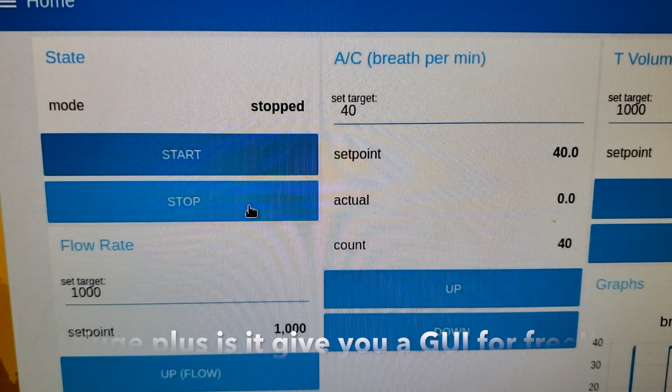I'm using Node-RED as the engine. It's kind of an experiment. I never used it before, but I like some things and I don't like some things, but that's beside the point. So we have like an on-off kind of thing. Breathing rate, I think we're set for like 40 breaths per minute. Tidal volume, 1,000 I think is more than we want to stick in a person of air.

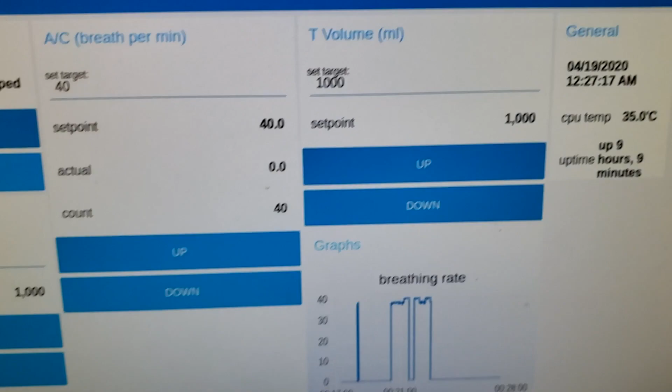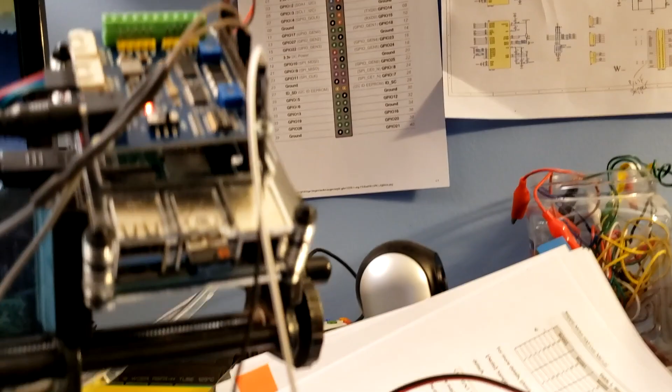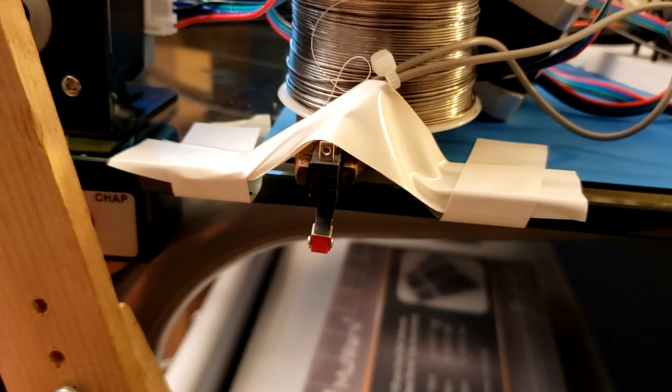And flow rate. So I decided to use a Raspberry Pi. There's many controllers you could use. I like Raspberries, but you could use Arduinos. A lot of people are doing it with Arduinos. This is like a stepper motor hat. Yeah, so these are stepper motors. This one happens to be 1.8 degree, 200 steps over 360 degrees. And I have like a homing switch. This stuff will make sense in a minute.

So we'll just go ahead and turn it on. Oh, and the cool thing about this Node-RED I'm using: you program it up with JavaScript and a little bit of Python, and it's an IoT kind of thing. So there's a lot of IoT type things you could do, like turn it on with Alexa. Alexa, turn on the ventilator to 10%. Starting.

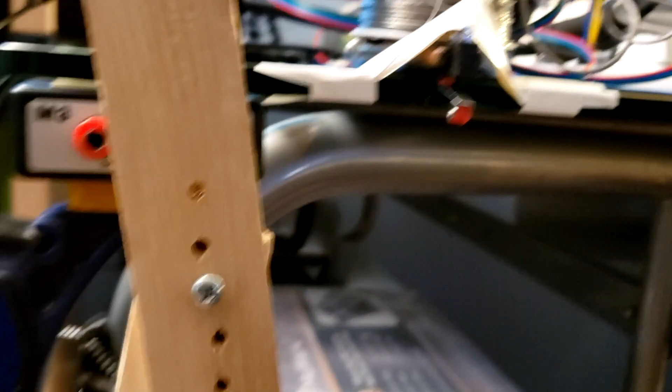So I don't know if you saw that, but basically it located that limit switch because it needs to know the home position, they call it. Anyway, so this is sweeping back and forth about 90 degrees. So 90 degrees is my maximum. So basically, in theory, what this contraption is going to do is take rotational movement and make it linear.

So the back and forth on this left-hand side would be like a bag, like a bellows bag. So that's on order. So it's moving maybe about 4 inches. And the nice thing about a bellows bag is it's kind of linear. It's a rectangular type, like a cylindrical rectangular thing. So if I move like an inch, I know how much volume, in theory, is supposed to go into somebody's lungs.

So if you notice, this is sweeping about 90 degrees. So if I want to put less air into somebody, we just go in here and say I cut it down to like half. The cool thing is this thing has error checking, so if I go up, it says 1,000 is my maximum. So say I put a bunch of 9s in here. So you get warnings. So I'm going to go ahead and stick 500 in here. Oops. 500. Okay, it took it.

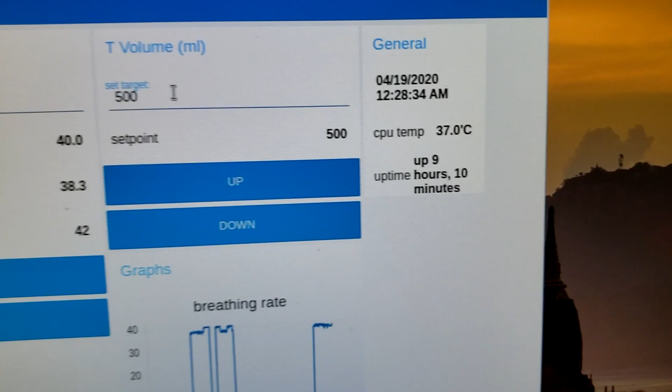So there it goes. So at this point, we're moving 45 degrees back and forth versus 90. So that's what that tidal volume is. So I'll stick it back to 1,000. I want to show you something else. So now it's going to sweep back and forth 90 degrees. Got some cool graphs over here.

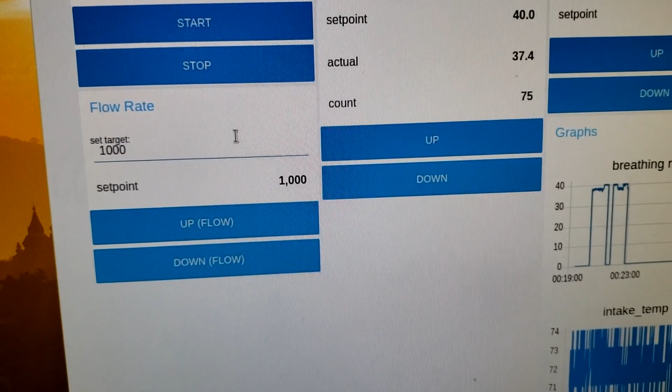So at this point, the breathing rate, although the set point is 40, I'm only getting 37.4 out of there. And the reason for that is we're not moving fast enough. We're a little bit on the slow side. So basically, to move faster is this flow rate. It's how quickly you push oxygen into somebody. So we have 1,000, and I crank it up.

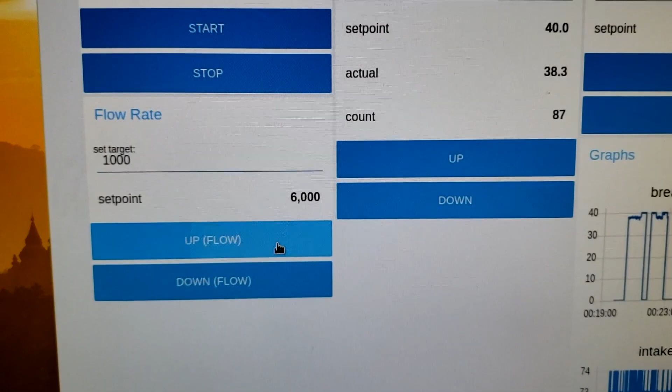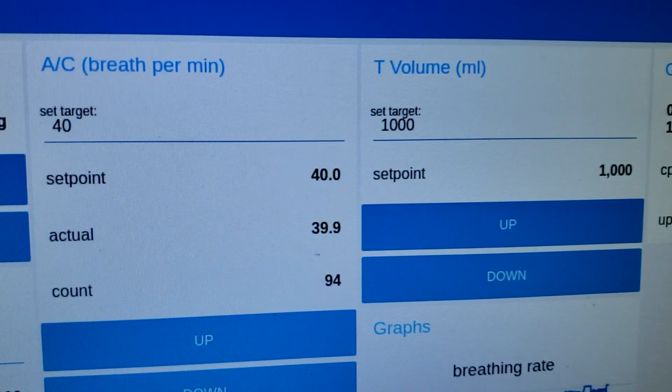And basically, in this case, this is just for me. This is debug. This is 1,000 hertz. This is how fast I'm moving these stepper motors. So I'll crank this all the way up, which is about 8,000. So you see that it's cruising now, and now it has to pause before it goes back. And at that point, we'll get our 39.9. We should get our 40 breaths per minute, or something real close to it.

So that's more or less where I'm at with this project. The next thing I'm going to do is get a pressure sensor for assisted breath. So instead of force feeding the breath, the thing will monitor when a breath wants to be taken, and also all sorts of other fun stuff like not overinflating the lungs.